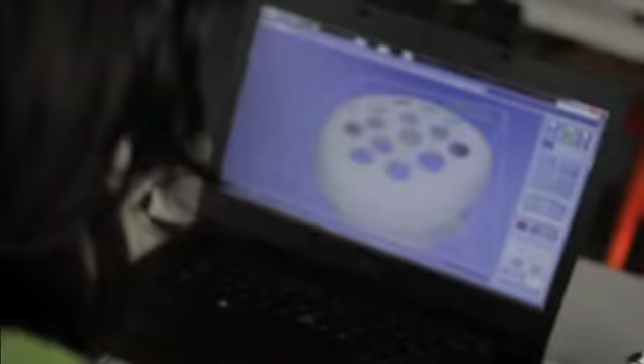Haptics is the science of touch. This is Cloud9, which is a haptic sketch modeling software. And this is a haptic device. It's similar to a 3D mouse, but it provides force feedback. A haptic interface helps you interact with a virtual object in a virtual space, but using touch.

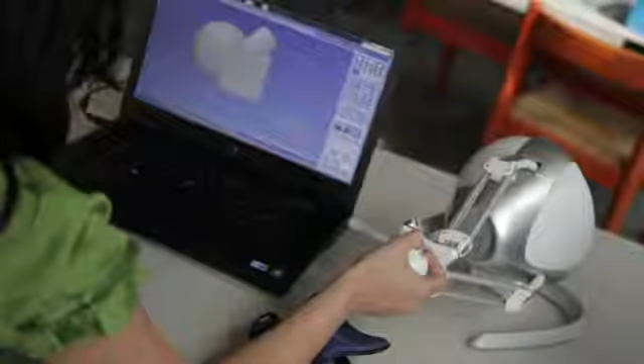One of the most exciting things about Cloud9 is that you don't actually need to have a CAD background to be able to draw and create using it. I guess so long as you can turn the computer on, you're pretty much good.

So I can move in all these directions, but also I can go up to the surface of an object and actually touch it and sort of feel the device pushing back at me when I go up and touch the object.

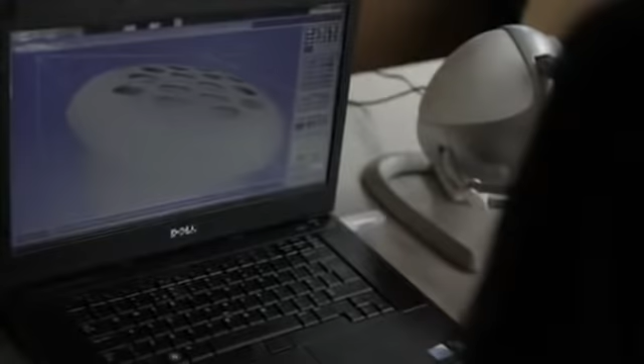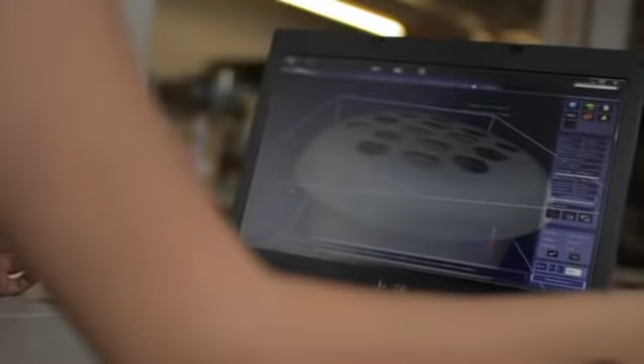When I go up to the surface, I have the option of changing the stiffness of the object. So if it's quite a stiff object, I can go up to it and sort of feel it, but only to slide around it. Can't push at it, so it's quite hard. Or I can change the stiffness to make the object quite malleable.

So I'm just about to deform the surface. I'm actually going into the object and then pushing out at the skin to create these spikes.

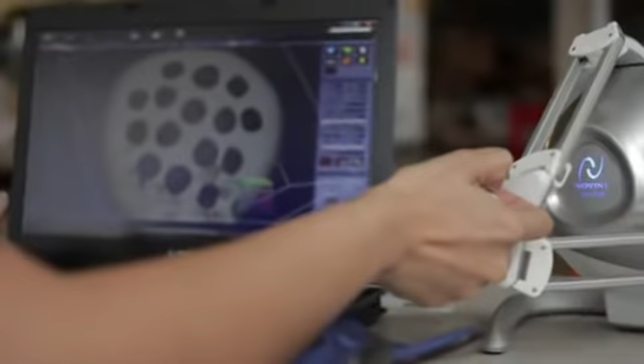This is quite similar to the way in which we work with our hands with actual materials, which makes it more intuitive. Because, as I've showed you, it's quite easy to move around in Cloud9 and being able to understand the form of an object through touch, it's not a very big step to then start manipulating it and playing with the object. And so you kind of fall into designing almost through playing.

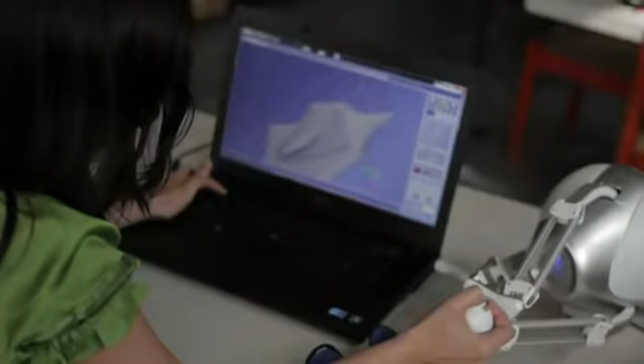So rather than thinking of what I'm going to design on paper and then going to draw it in a CAD package, I can do both the modeling, sort of almost the 3D doodling side of it, as well as building the finished object. They kind of happen side by side.

Because it is a computer package at the end of the day, it lets you access the possibilities that computers offer. Just even simple things like being able to save something and then make a different version of it, or undo, or cutting and pasting. But it just also has the facility to be able to touch things and feel them.

I think with conventional CAD packages, or at least I felt with conventional CAD packages, that I was always removed from what I was making, because there is this barrier between you and it where you almost have to learn a different way of looking at the object and thinking about it.

I didn't really get immersed in using 3D software until I used Cloud9, because it let me come to grips with it and manipulate it in a tactile way and think in a way that I was used to thinking with materials in a physical sense, and apply that thinking process to the creative experience. And so Cloud9 is really, I couldn't do what I do without it.